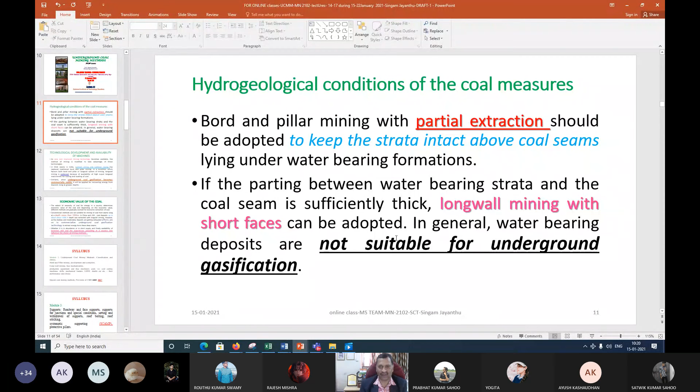Now continuing with our class, before that, if you have any doubts till now, till last class, you can utilize our WhatsApp and also our phone, whatever. Then now we have been discussing about various factors, and we also should enter into the next part of our modules on classification of mining methods, and then opening the deposit with depillaring or longwall, different types of systems. So continuing with that, in the selection of mining methods or the classification of our underground coal mining methods, I would like to continue showing only 1-2 slides and later enter into the next chapter.

Now we are left with some conditions like hydrogeological conditions, where your strata is with water, or there may be overlying seams, underlying seams, adjacent workings already waterlogged. In that case it is very difficult for us, or sometimes you may be working under the sea, under the river, or under the pond.

So in that way, please note down some examples when I talk about this, where we use partial extraction techniques also, something like working in GDK 5 incline of Singareni, under Janagam tank, Jangaon tank, that is a water tank, and it was extracted. That is some example I am giving you.

And then in Amlabad colliery, where it was extracted under Damodar River. Under the river we are extracting the coal seams, and that Damodar River was extracted with longwall mining with stowing. That is a very specific case, and of course there was some problem later. All the details I will tell you.

But what is important here is when there are some hydrogeological conditions in such a way that it requires that we should not extract everything. Either you have to backfill it so that adjacent or upper strata should not get disturbed, or otherwise partial extraction, or extraction to the maximum possible extent and then filling it back either with sand or pond ash or some other materials. If it is in metal mines, then that is generally done by your tailings mixed with some cement and other things.

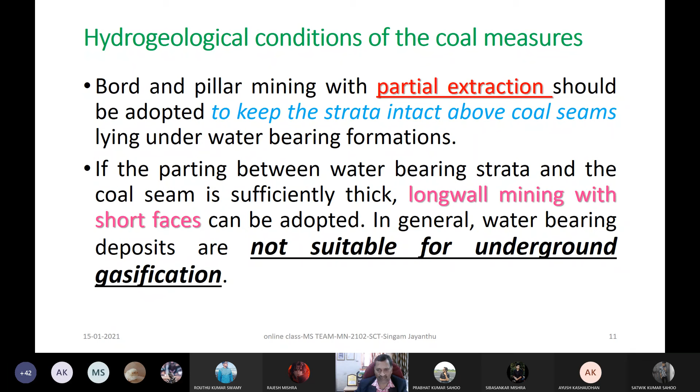There is another point here. Generally, when you go for more depth cover, or highly gassy seams, or where there is a chance of explosions or more methane content in the seam, but if water is there, then it may not be suitable for underground gasification. Of course, underground gasification is supposed to be done where it is very difficult to extract, but even in that condition, if it is water bearing, that may not be suitable. That is the meaning of this.

Now, the last but one point here is, in selection of the method, or the factors influencing selection of the method, is technological development and availability of machines. Now what is the meaning of this?

Nowadays we are getting a lot of new and improved mining technologies, and the latest, as far as underground coal mining is concerned, is longwall mining with even up to 300 meter face, and support systems even more than 1,000 tons capacity, even shield supports up to 1,200 metric tons capacity. Or even continuous miners, with rate of extraction can be more, even in board and pillar. So many things are coming up. So the method is modified to take advantage of the technology.

That means you should consider, when some condition is given to you to decide which method to adopt in that geomining condition, what are the recent technologies adopted. Nowadays our world is open, a global world, a global economy. We are striving for our 5 trillion economy, we are also part of it, to make our Atmanirbhar Bharat the greatest in future. Unless you go for new and improved technology, whether it is mining or anywhere, it is not possible. So you should take advantage of that, you should know what are the technologies, then you like to adopt in your suitable geomining condition there.

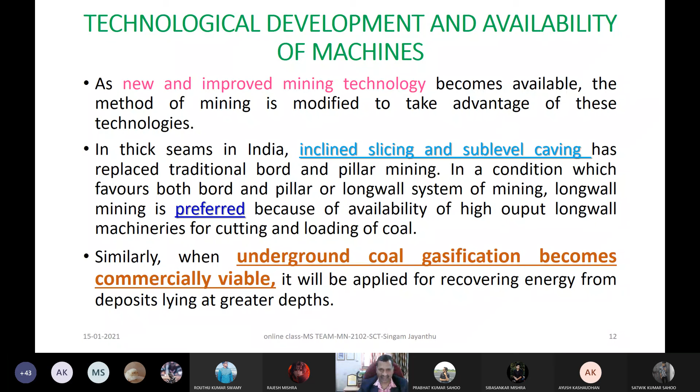We have to go for this in future. When coal gasification becomes commercially viable, we have to apply for recovering energy from deposits lying at greater depths, and also from those which cannot be mined by conventional methods - note down the phrase 'unmineable'. For such deposits, we should think of extraction not as solid coal, but through coal gasification - extracting the energy or gas. That will become the ultimate option.

Economic value of coal is also very important, and that you should understand in selection of the method. In simple layman's language: coal of different grades used to be graded A, B, C, D. All open cast mines were in E, F grade roughly. A grade is almost nil, very less. B is the best coal, like gold for us. C and D grades, many underground mines have these. B is the greatest, the best available in India at present.

Nowadays we call it G1, G2, G3, G4 - this gradation is given based on British thermal units, what we call calorific value of the coal. Depending on that, the cost or sale price is determined.

It's very simple to understand. Suppose at one place coal is best grade, costing maybe 2000, 3000, or 2500 rupees per ton, and at another place coal is very inferior grade, selling for only 1000 rupees, or 500, 600 rupees - nowadays ranging from 1000 to 3000 rupees.

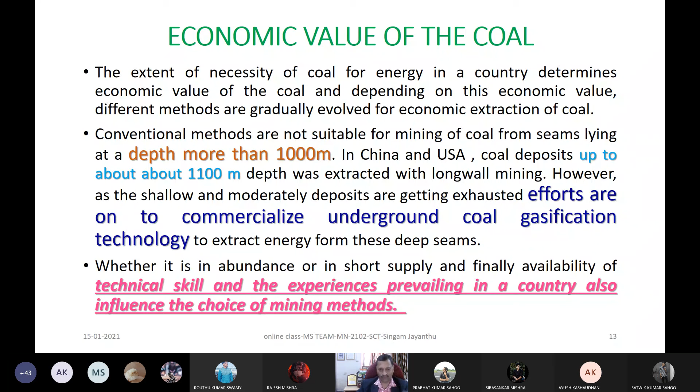Shallow and moderately deep deposits are getting exhausted, and efforts are on to commercialize this gas. Finally, availability of technical skill is also very important in a particular country, and experiences prevailing there also influence the choice. I can give examples depending on your assignment topics, where choice is based on local public - people trained in which type of technologies - and all those things are considered.

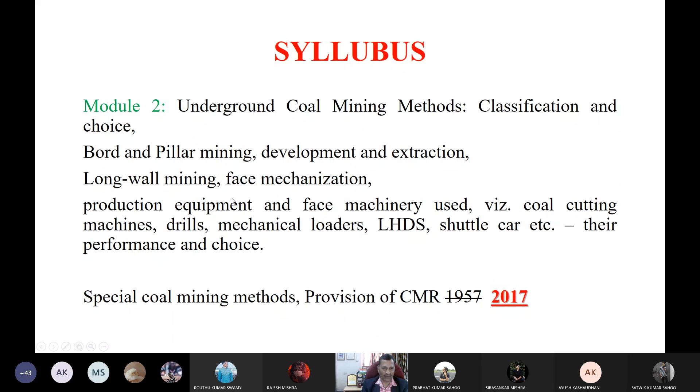In module 2, we have underground coal mine method classification and choice. Regarding choice, we already discussed which factors influence selection - geological and other factors. But classification and other aspects of board and pillar mining - development, extraction, longwall - these are things we are supposed to discuss further. This is just to remind you of what will be discussed in future.

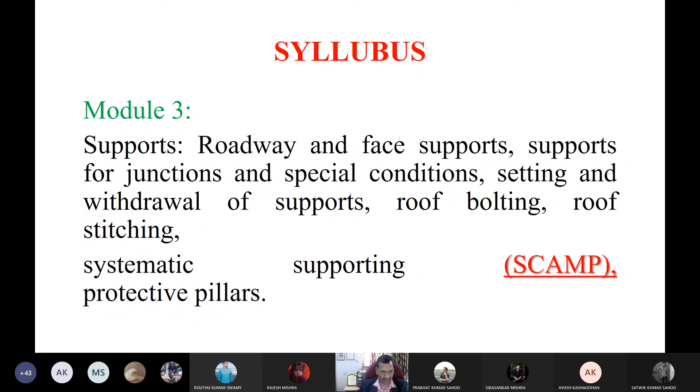You have taken very good assignment topics where you will be covering so many things, and I will be giving you a lot of recent information during discussions and presentations on different topics. That's why I'm showing you in module 3 about the support, in module 4 about the filling methods and other things. Right now, coming to the classification...

As I told you before taking a small break, I would like to say for 2-3 minutes here where classification is generally done. As already I told you in the reference books I have provided, these are from my gurus - Professor R.D. Singh Saab, who was my BTech teacher and project guide, and then Dr. T.N. Singh Saab, who was an eminent scientist and also director of CIMFR. Under both of them, under their guidance, I did my BTech, PhD, MTech, whatever.

Some of the works they have given beautifully in their books, on classification with the method, underground, thick seam mining classification, so many things. But in general, for the discussion purpose, I kept it simple.

Broadly, when extracting our underground coal deposit, either you allow that to cave - that is you are not using an alternative - or you are stowing or backfilling it. This is the broadest classification. That means you are extracting the coal and you are allowing the GOAF, G-O-A-F, either to cave or you are filling it back with backfill.

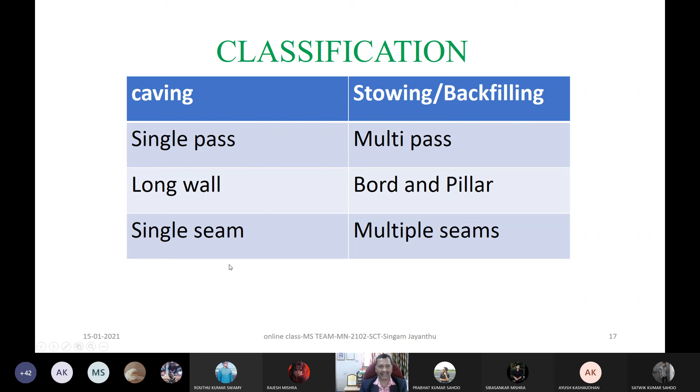Now, whether it is caving or backfilling or stowing, both can be either longwall or bord and pillar, and there come so many things, right? If it is a seam thick or thin, then horizontal slice, or inclined slice, or slicing in between, not horizontal or inclined, in between also we can have. There are so many ways how to do that. And then it can be cases with single seams and multiple seams, right? So like that, it will be there in general.

And then some special methods of mining, right? What are the special methods of mining? They are thick seam mining, as I tried to tell you something, right? It can be a single pass, multi-pass, and then multi-section mining, right? And then this can be in the descending order.

Just this will be disturbing us. I am in the class. May I know who is speaking, please? I'm in the online class. Pandey sahab, we will discuss after half an hour. Online class, yes.

Now it can be in the ascending order or descending order, right? Ascending order with stowing in section 1, 2, 3, 4 field and up. Descending order with caving like that. Or it can be bord and pillar mining. These names you can note down so that we will be discussing in detail into whatever happened.

And one more thing, my beloved students, something like bord and pillar mining or even yield pillar techniques and even the blasting gallery method, which was recently found not suitable because of some failure problems. There are cases where we've tried to find solutions and experimented, found to be highly suitable for similar conditions. Later, after 10 or 15 years, because of widely varying situations where it is implemented, that may prove to be a failure. That's what happened in many cases, my beloved student. That is the reason why you should be more attentive in understanding the practical problem and site specific conditions before applying the suitable methods.

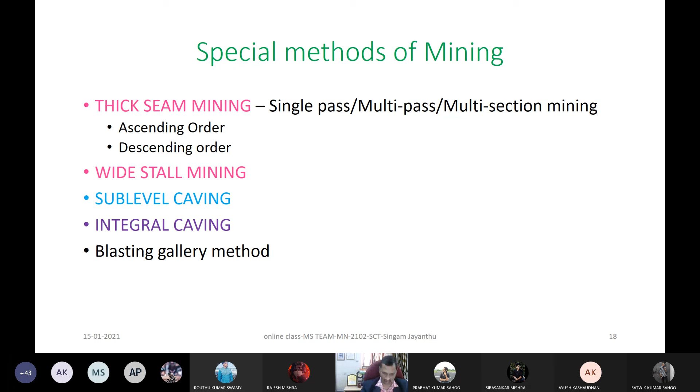Then blasting gallery method, already I given you, whether GDK 11, 21 incline, VK7, or in so many mines in GDK 8 incline also for that matter, 10 incline, like that.

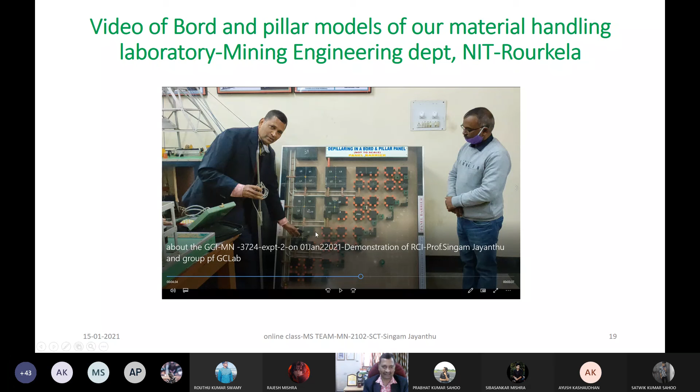Okay, now these things I would like to show you, my beloved students. Here I would like to take a small break. Right now it is 10:35, right? So I will be showing you, since you are not available here, my beloved students, on this auspicious Kanuma Day and also National Army Day, I wish that you should become like army men and women to take care of new innovative mining methods in future. So that's why it is part of our video taken for different purposes, including your purpose, to show you the models of our underground coal mining methods with bord and pillar. This is where we will be going in detail later after the break.

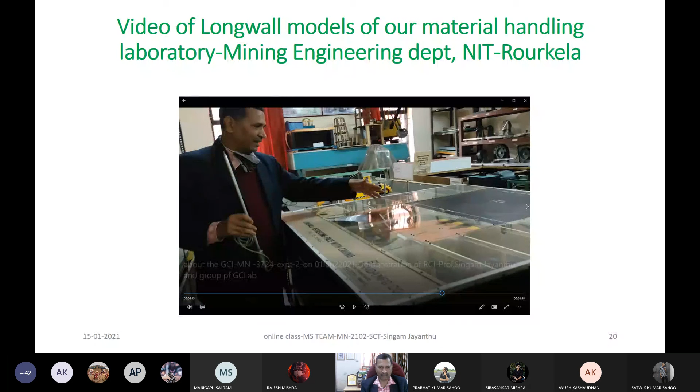And also we have a model for longwall mine. These things I will be showing you, my beloved students, before going into other opening out districts and other topics. I will take you through these things with a small break here.

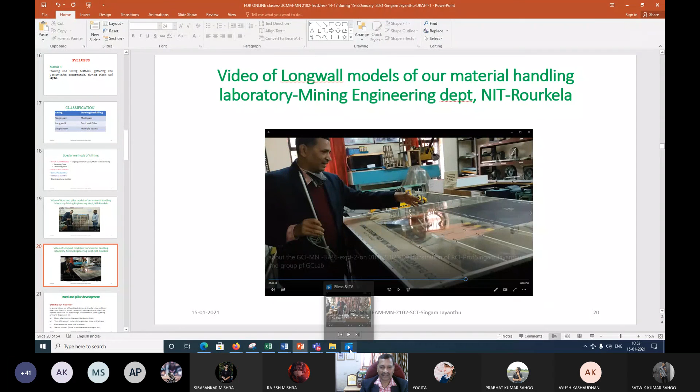So now I am showing you. Let me know whether you are able to see my screen, right? I am opening the video of our model laboratory, whatever we have here. Yes, are you able to see the screen now? Right, yes, so first I will show you this bord and pillar model.

Acha, how many of you have seen this model in our laboratory? This is there in our material modeling, material handling laboratory, and our caretaker there is our Brahma ji. So Brahma is like the creator of all these models. Whatever model is created, your face, my face, is by Brahma. So our Brahma ji is in charge of this lab.

And here you can see our beloved senior scientist from CIMFR also, our Professor Sayendra, who joined recently and interacted with you also on some auspicious day. I used to do that.

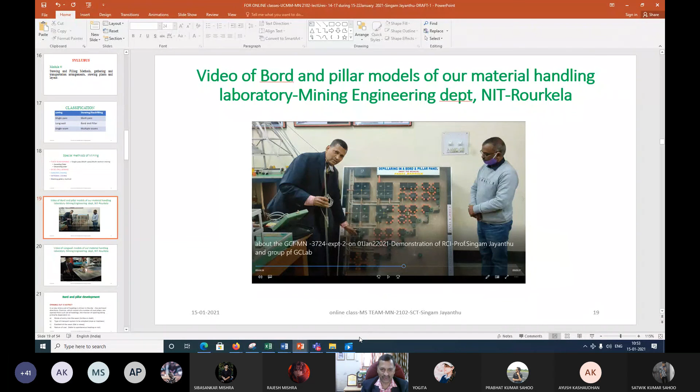And now I am taking you to that place, my beloved students. Are you able to see this? This is that video clipping, just I am showing you. And this is, what is this lab? This is the ground control lab, right?

And now I am taking you from the ground control laboratory along with my Bhaskar -- Bhaskar meaning Suraj, right. Here, now we are taking you. Are you able to hear the voice here? No sir, no sir.

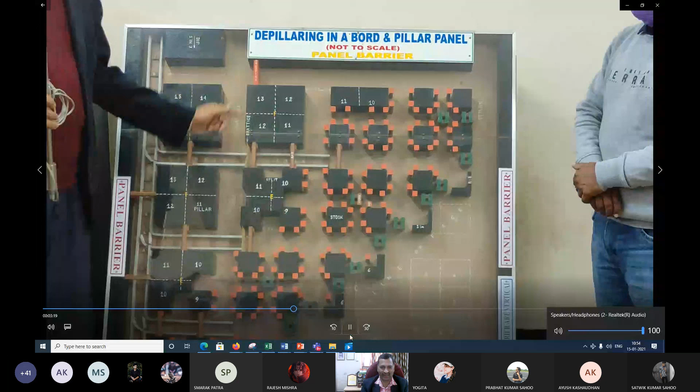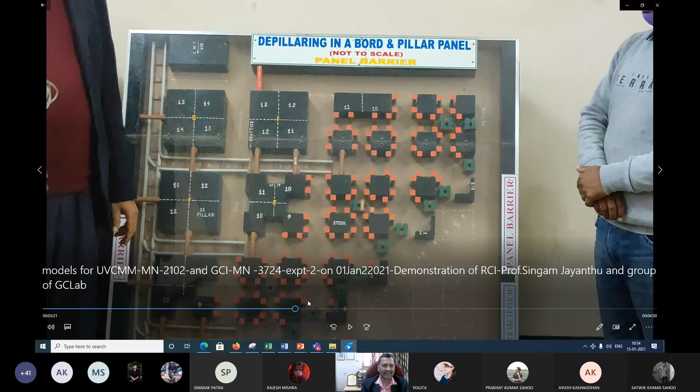Okay, so this is that model, right, of depillaring in a bord and pillar panel. But I would like to explain to you what models we have, so that especially those who have not seen or taken any training will get some idea here. But before that, let me know, how many of you have seen this model?

Yes or no? No one, sir. Okay, no sir. So I am not a very good dubbing artist like Amitabh Bachchan or anybody, so you should bear with me.

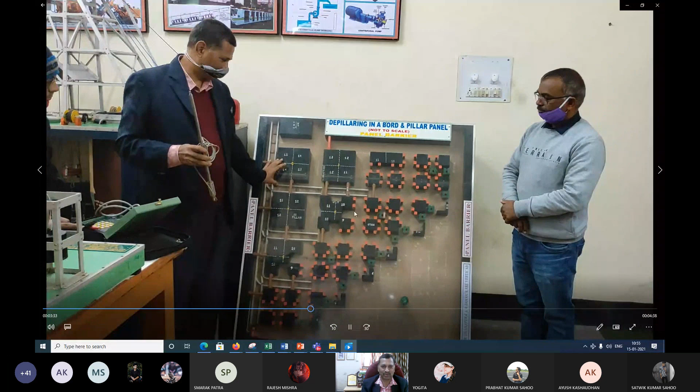It was explained in that, but the video is not audible to you. This is that bord and pillar workings, how it looks like. Of course, depillaring is being shown here, and the purpose of showing this is for some instrumentation and then understanding the strata behavior. But here I will be utilizing this for your purpose, right?

And these are the galleries, these are the levels, and then this is the dip direction, and this is the line of goaf, whatever is there during extraction by splitting and slicing -- splitting that into 4 or 5 stooks, 6 stooks, whatever it is. So they will be doing that.

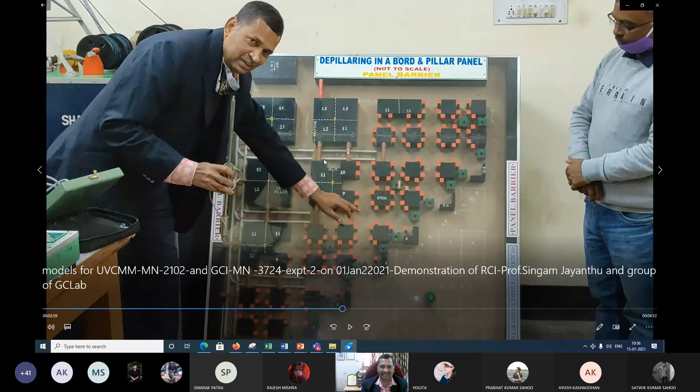So here now you can see, my beloved students, when only development is there, it looks like this. Now you can see when development is there -- or even just imagine that there is no depillaring, something like this, and this is all virgin, meaning all solid coal, and your development is only up to this. Right now, what will you be doing? Now you are developing this development gallery. This is a level that you are doing it.

Now you laid a track like this, along the dip-rise direction, and there you may be maintaining your endless haulage, not endless. This is your direct haulage, maybe from the surface, or a tugger haulage in between, from the surface or in between levels or trunk roadways.

And then you are opening your levels like this, and you will be blasting this place, going further, considering that this is a virgin seam, not developed. You imagine that. Then you are blasting this, loading this, and then loading that coal onto either LHDs, SDLs, continuous miner, or side discharge loader, or gathering arm loader, or whatever, onto the tubs, or onto the conveyor. This can be a conveyor belt. You can have it, right? So this is the way how you can be doing that development.

That's what I would like to show you here, my beloved students, and how this is designed, how much size we keep generally. Before that, when you are developing like this, this is exploring, but still you need some ventilation, right?

Some ventilation stoppings are required between one as an intake roadway, where intake air is coming like this, and then from here it is entering here, and then the return, now it has become return because these are the places where you will be blasting, so air will be mixed with blasted fumes and so many things. Even if it is not blasted, even if it is cut by the coal cutting machines, a lot of coal dust and so many things are generated, and because of the temperature of the strata, there will be a lot of heat and humidity, then your air quality will be deteriorated, and that is going as a return airway.

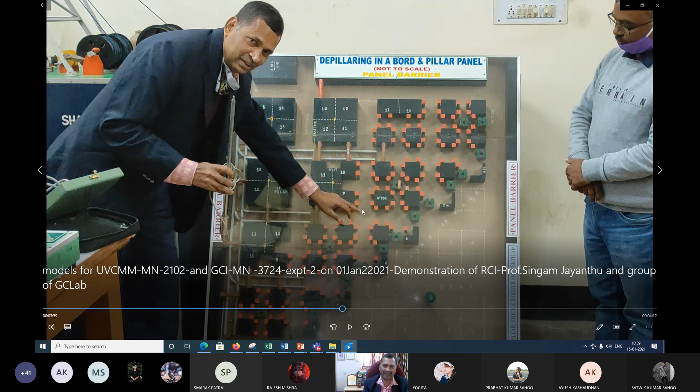The panel, how it is designed, that can now be called a development panel. But when it goes already developed, how to decide, even while developing, you can decide how much should be the size of the panel, right?

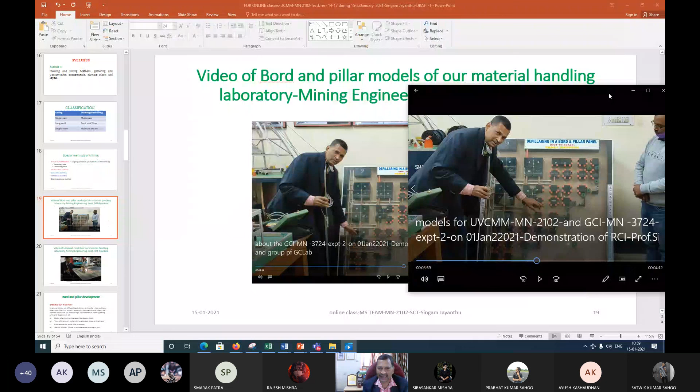So that we are taking care based on whatever may be the incubation period of the coal. When the incubation period of the coal allows you for only 6 months or 8 months or 10 months, before that period, how many number of pillars you can extract, then you will keep the size of that panel.

Then you call this panel 1, panel 2, or the name of the panel may be Yogita Madam panel, or it can be Karthik panel, Jasmine panel, Nikita panel, like that, whatever name, or 1, 2, 3, 4 number, whatever you give. This is the way how the districts or panels are created.

And then when this development, everything is over, you will not allow that regular air ventilation to go through in the same way, so many ways, later we will discuss about that. Now you see, when you go further here, you will be seeing some more, even a longwall panel also you can see. But here other things I don't want to discuss so much, about the instrumentation, I was explaining for a different purpose. Now, if any doubts, of course, we can discuss.

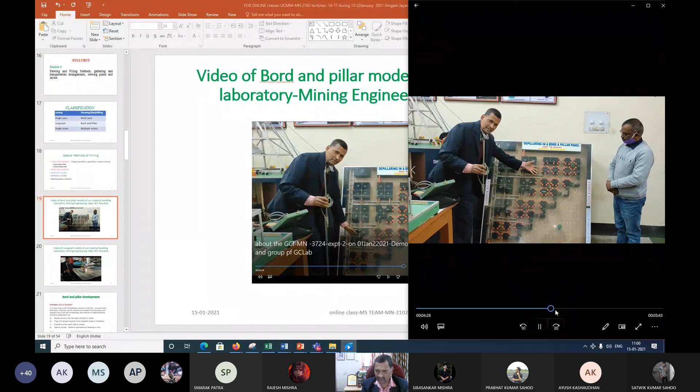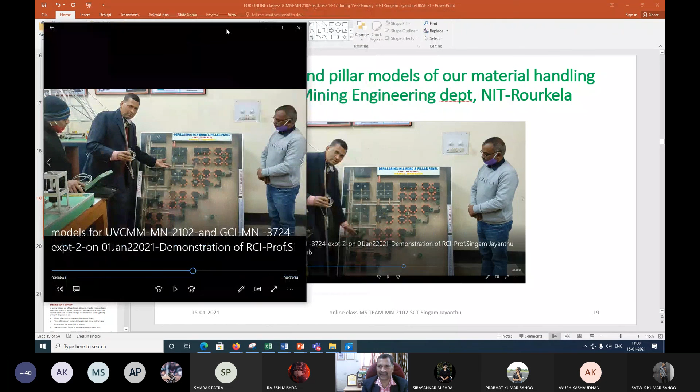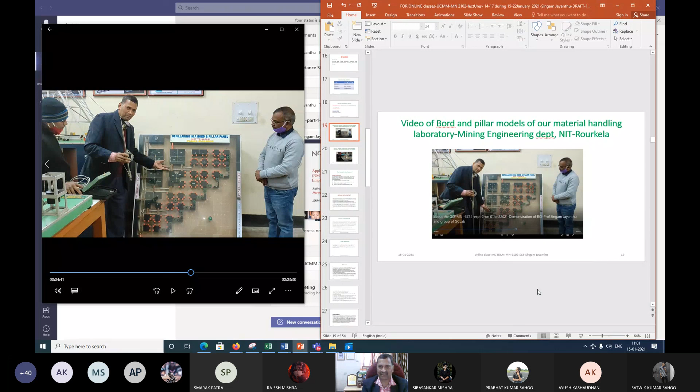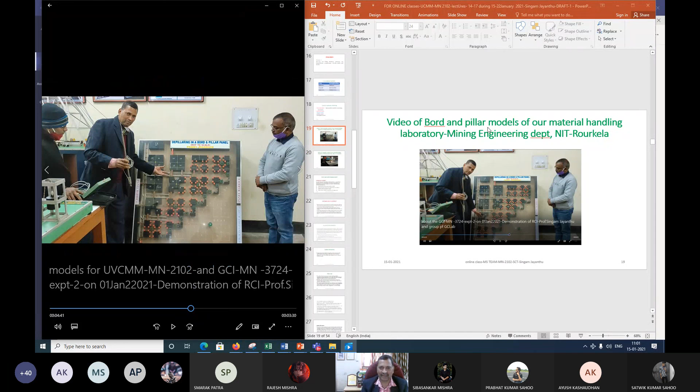But at this place itself, let me take you. If you have any doubts about this formation of the panel, let me address it at this place itself, my beloved students. Any doubts about the formation of the panels? Let me keep it in the window so that it is easy for us to discuss further. Any doubts about the formation of the panel, whatever we are discussing as far as the bord and pillar is concerned? Meanwhile, later I will show about the longwall panel.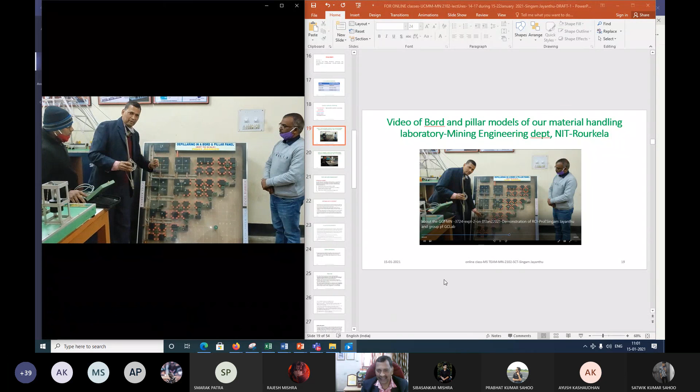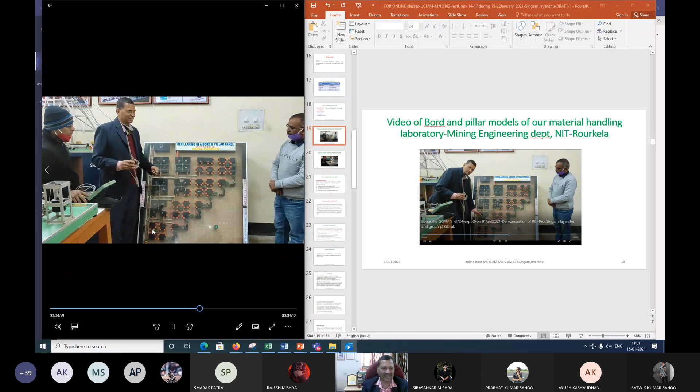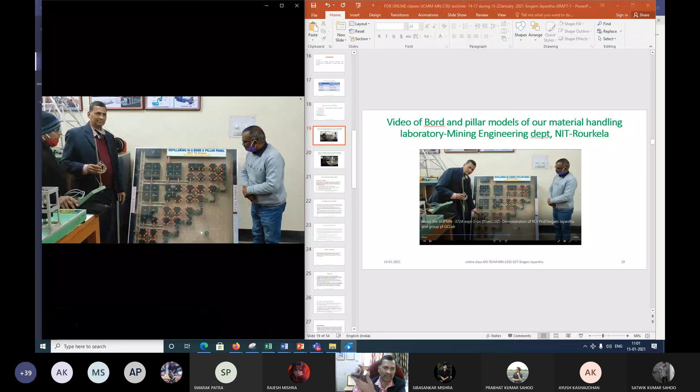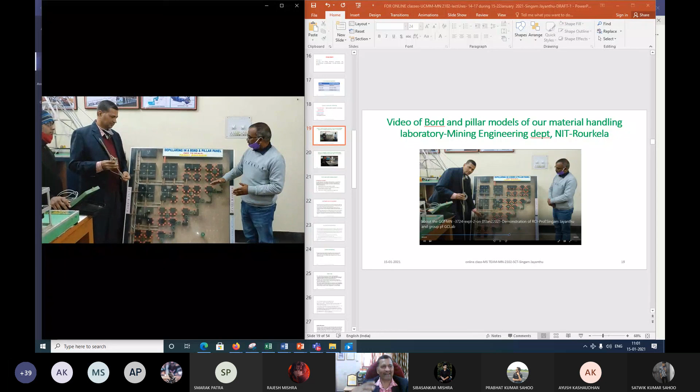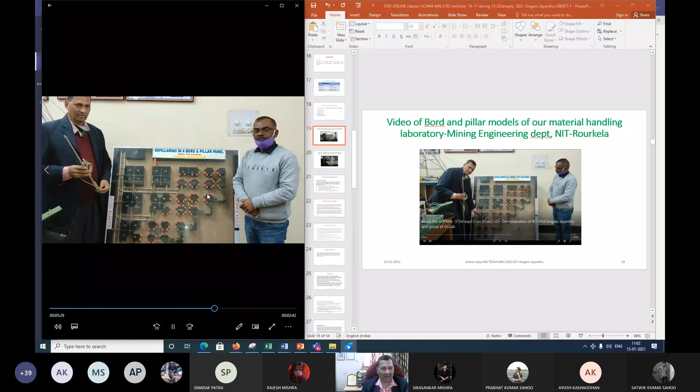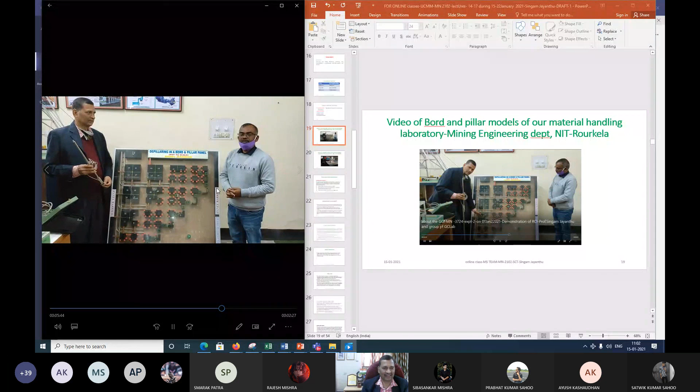Here also our Professor Sahendra helped me in explaining further with his wonderful experiences about conducting so many experimental trials, including some which I initiated when I was a scientist at CMRI. Later he continued in our own group, same group, along with mine model and mining methods department. So when you come back here, definitely you will be seeing.

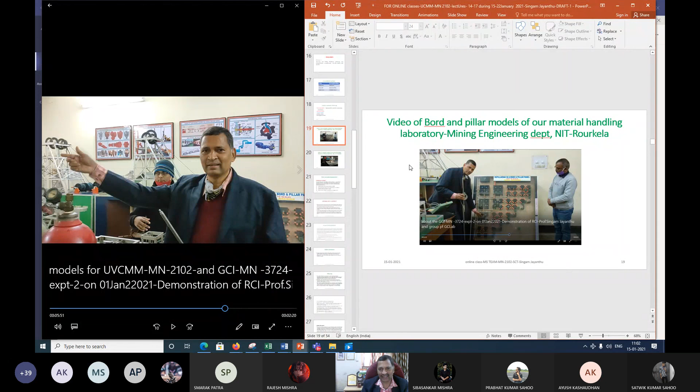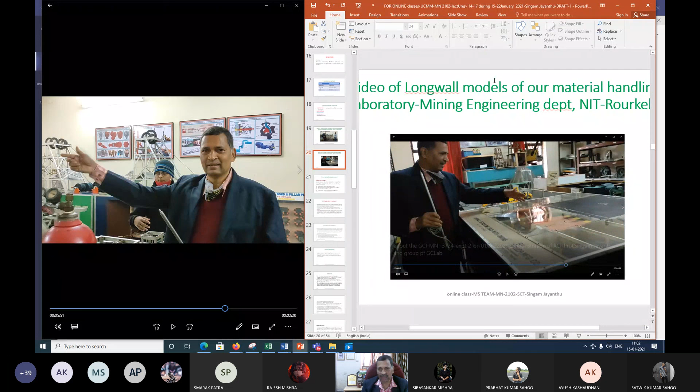Now I am taking you, my beloved students, to the next Longwall panel. How this long wall panel will be looking like, that I will be showing you, my beloved students, about the Longwall model. Now you see how this long wall model is.

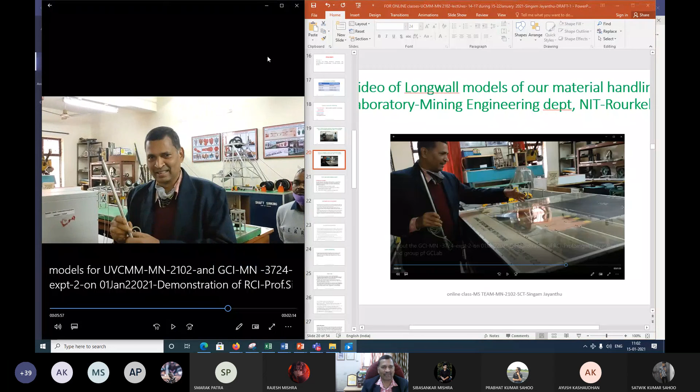I am just showing you, and meanwhile I would like to give you one good impression on this auspicious day of Kanuma Day and National. What is the day today? Anybody to respond? This is also another auspicious day, the 15th, this is National Army Day. I wish that all our underground mining engineers, including our Professor Sahendram who also passed here, become the next generation creators of new technologies as part of our Make in India, Atmanirbhar Bharat, in creating new underground coal mining methods, my beloved students.

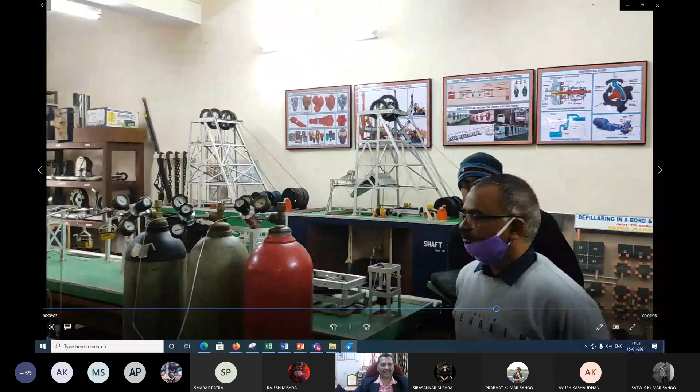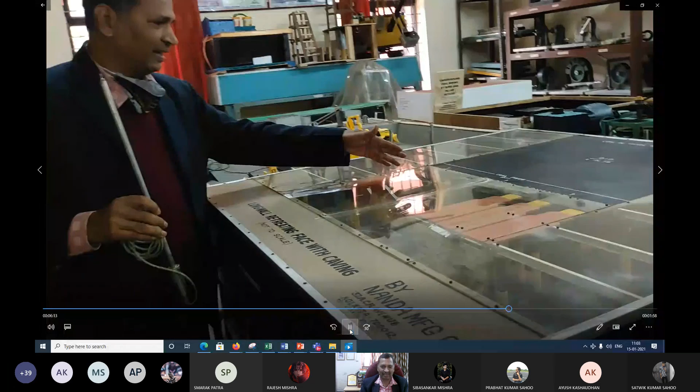So now I am taking you to the long wall panels. Meanwhile, you see all our model, you feel as if you are there with us in our NIT Rourkela. Don't worry about the cylinders, that is not going to harm you. You consider that cylinder just like the cylinder used for our chicken biryani or the very good naan prepared using that methane.

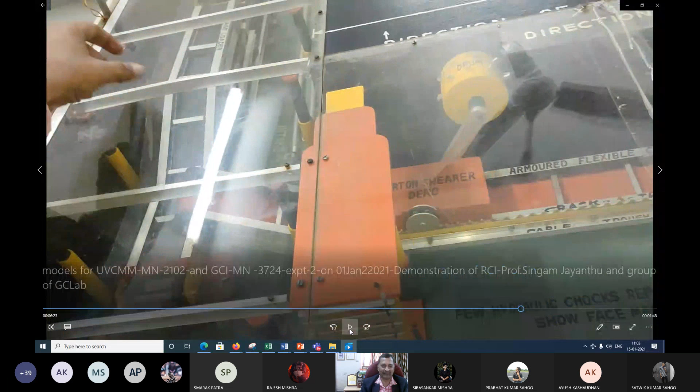Right now about this long wall panel. Now I am taking you to the long wall panel, my beloved students. Here you see, this is the main gate roadway. You may note down somewhere, main gate roadway, where what are there in that. I will take 5 more minutes, now it is 11:03, my beloved students. Then this is a stage loader, it is written here, stage loader.

And then this is a chock shield support, and here it is a shearer. This is a shearer, a DERD shearer, a double-ended ranging drum shearer. And then these are the drums, one drum here, another drum here. There are 2 drums.

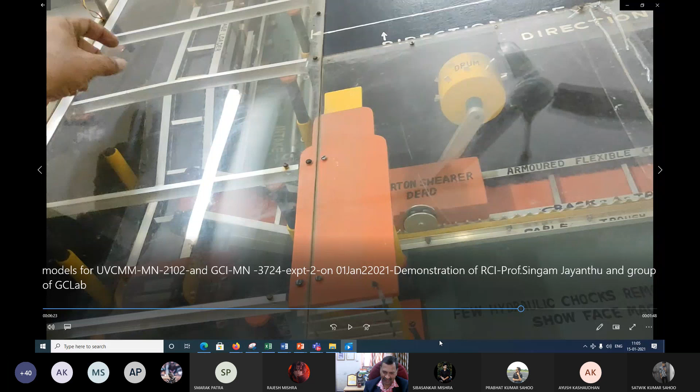Now you see, this is your long wall working face, how it appears. And then armored flexible conveyor, AFC, is here. When it is a thick seam, you will be having another conveyor, something parallel to this but below this shield or inside the goaf. This is attached to the shield, maybe your armored rear conveyor, so that the coal from the goaf, whatever is there in the roof, falls right onto this. So that is the method of mining we have to do.

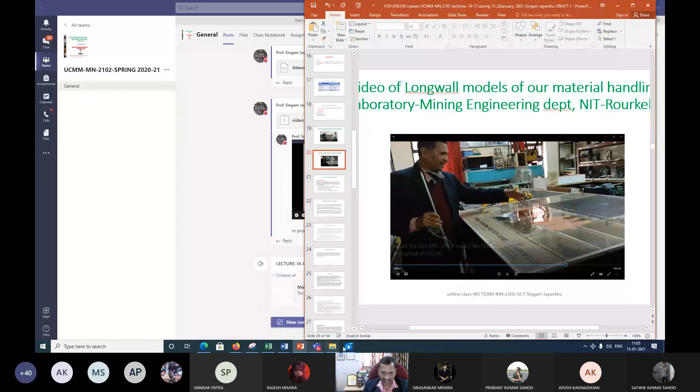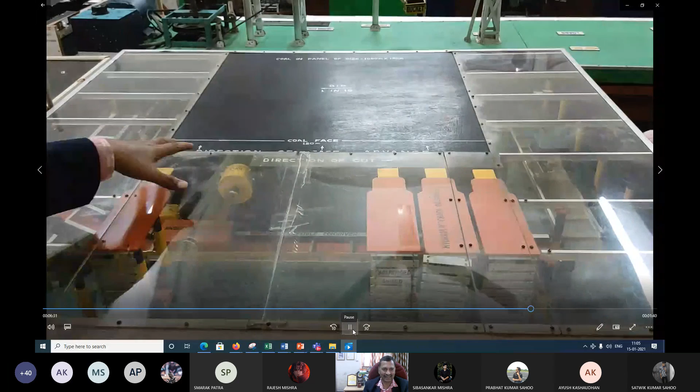Now you see some part of, and that is a tailgate, and this is a face, working face, like our students. And then you can understand better how this shield support works. This is one shield support, like this, these are the chock shield supports along the face. Now you can feel highly comfortable when you are there below this chock shield support.

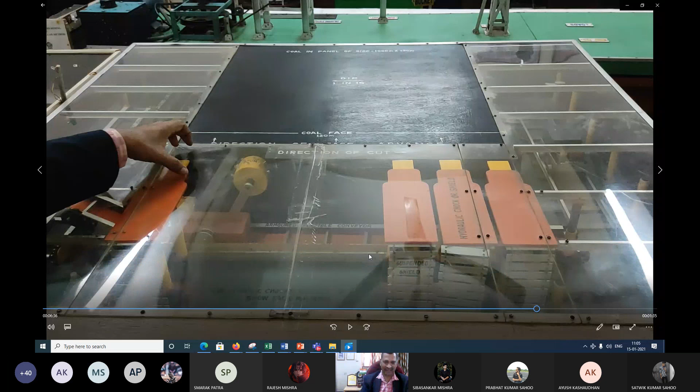Now, my beloved students of underground coal mining methods, this is also a reason why I encourage, since my joining here in 2006 as a professor after about 2 decades as a scientist, to do some transdisciplinary, translational, industry-oriented research, including mechanical engineers, electrical engineers, electronics engineers, computer science, and nowadays artificial intelligence, machine learning. Now those things are here, you can see, my beloved students.

Here the mechanical engineer's job is to see what maximum capacity of supports I can provide. Now they could do even up to 1200 tons in Australia. So around 1,000 tons we are using now itself in India, like in our Adriyala project already. Example I used to tell you, also China made ones from Jhanjra mine in ECL mines, and then with CSIRO collaboration in Australia we are doing the Adriyala project, which is a mass production technology, more than 2.8, 2.85 million tons per year.

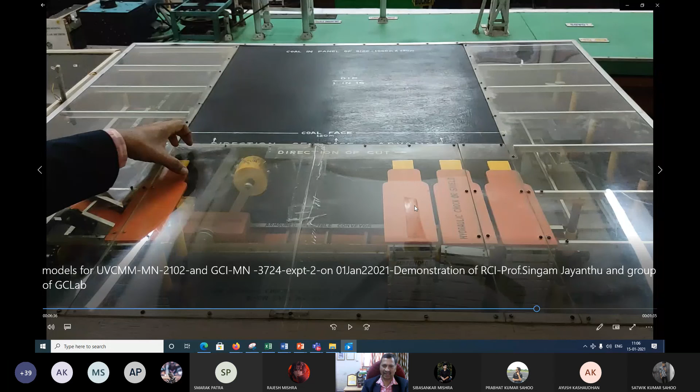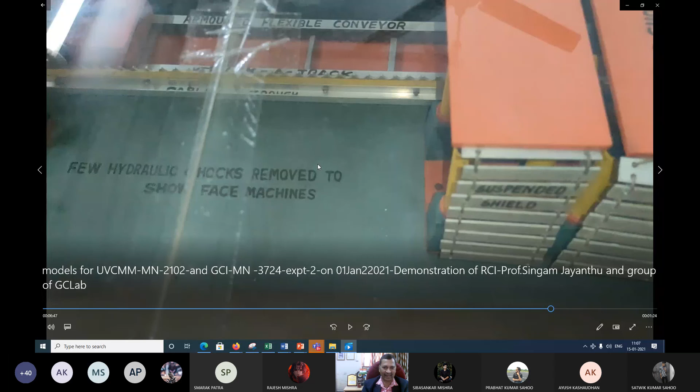Here a few hydraulic chocks are removed to show the face machine. Otherwise all these chocks will be there like this, and armored face conveyor you are seeing here, flexible conveyor, and this is falling coal onto this, and there will be some lump breaker, and this suspended shield - different laminate joints will be there, not only like this design, and that is a mechanical engineering job. Now you see a long wall retreating face with caving, right?

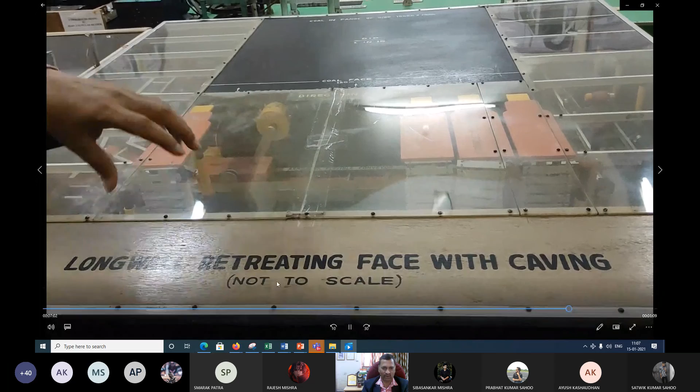This is not to scale, don't go by that - this may be 120 meters. In a short wall face, whatever I said, we have used in PVK mine only 60 meters. Otherwise, around 300 meters we are doing now, right?

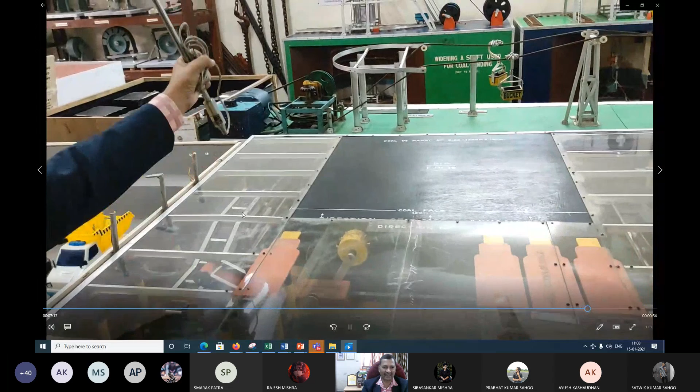This is just what I was explaining earlier to help you understand, but let me tell you - this is a stage loader and this is a belt conveyor, and there is a reason why a stage loader is required at this stage. Suppose there is no stage loader, would it be convenient? Can I use this flexible conveyor falling onto the belt conveyor along this main gate or not?

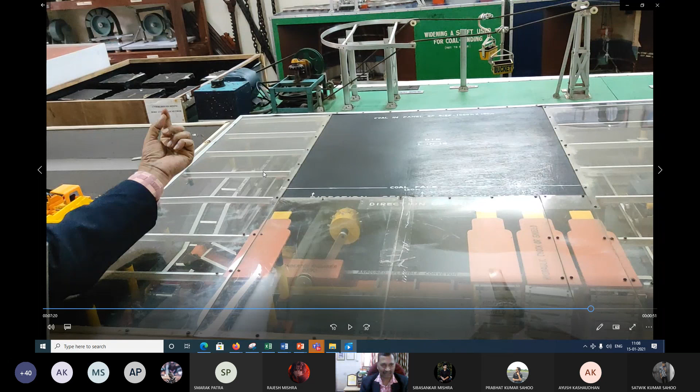That is a CEP question - not only a CEP question, that is a homework question for you, my beloved students. In the next class we will start with the answer to that question. Please note down somewhere why this stage loader is required - without a stage loader, can we have a face with the AFC falling onto the belt conveyor?

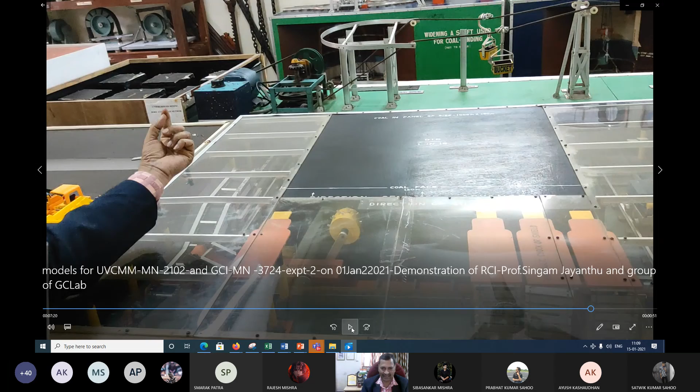Right, that's what I wanted to convey. At this stage, I hope you are having a feeling of being there - just imagine you are walking here.

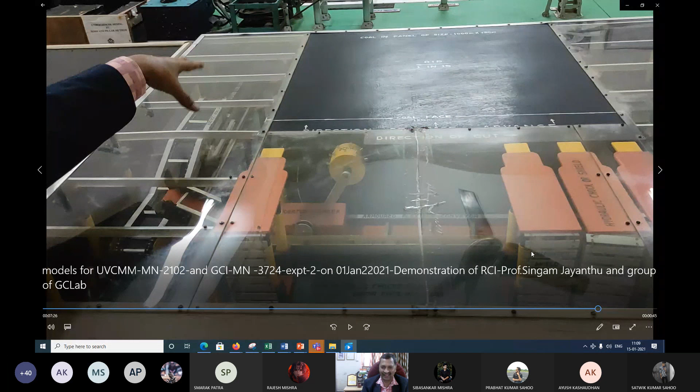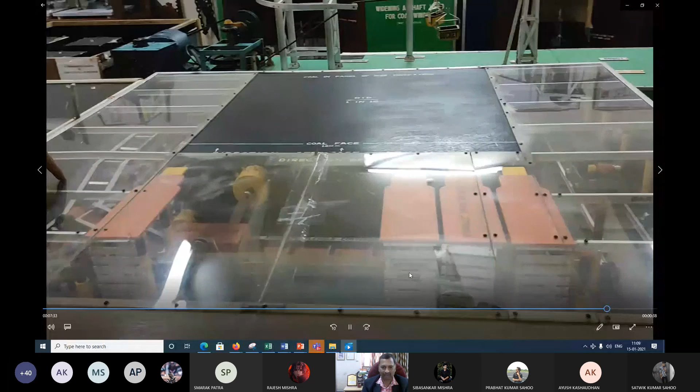Yogita madam is here, and somewhere Nikita madam, Jasmine madam, as a manager of this mine, or later as chairman of Coal India or CMD of WCL, whatever - they are working on this, doing the inspection. At present, as assistant manager and strata control engineer, underground coal mining in-charge, they are there. You imagine like that, then you will feel a lot of safety working under 1,000 tons, 200 tons, but there is care taken by designing coal mining methods properly.

Here I was just trying to explain, showing all these panels. Now I would like to stop at this stage.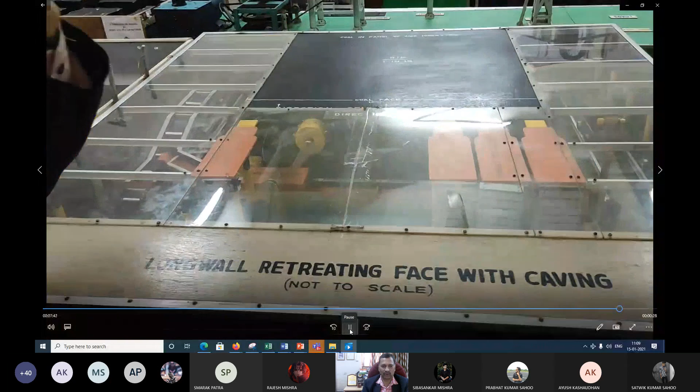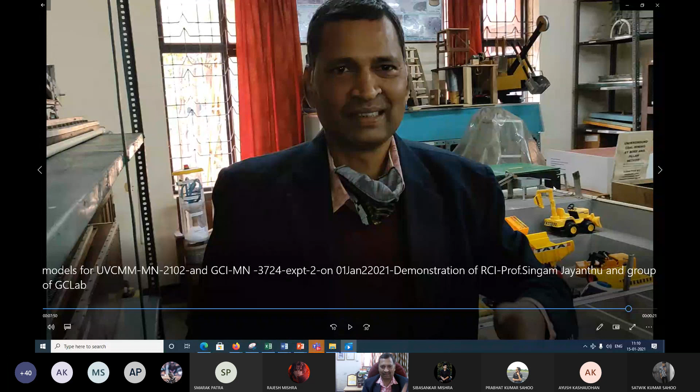My beloved students, longwall face with caving appears like this, and here with COVID-19, and then you have already nicely seen your happy National Army Day.

Now I am taking you back for your answer to the CEP question, my beloved students. Let me know who is answering your CEP question. Otherwise, any doubts, and then we will go to the summary, my beloved students.

Now shall we go for the summary? Now that is a long wall, right - we are there here. I want to show you the long wall with all this, right? So...

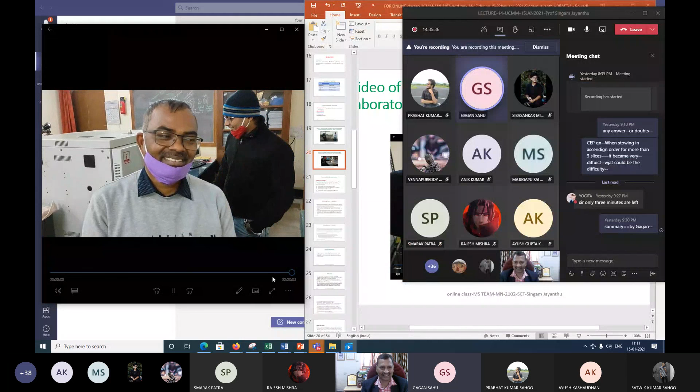We have studied that. Yes, anything more nowadays? Nowadays board and pillar mining has been replaced by sub-level caving and special methods, yield pillar techniques, and some other techniques, sir.

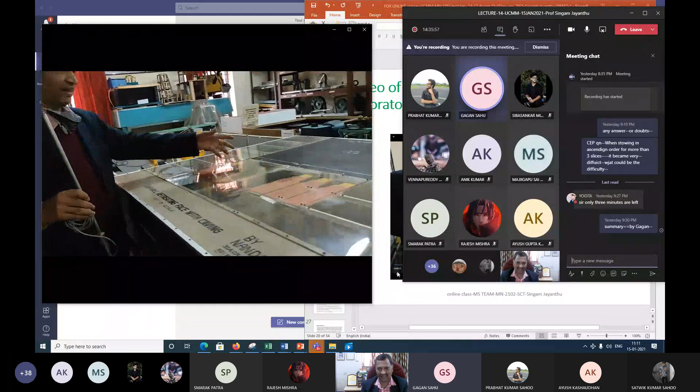Then sir, we have seen two models of underground mining - board and pillar mining, and long wall mining, sir. That's it, sir. Very good summary by Gagan.

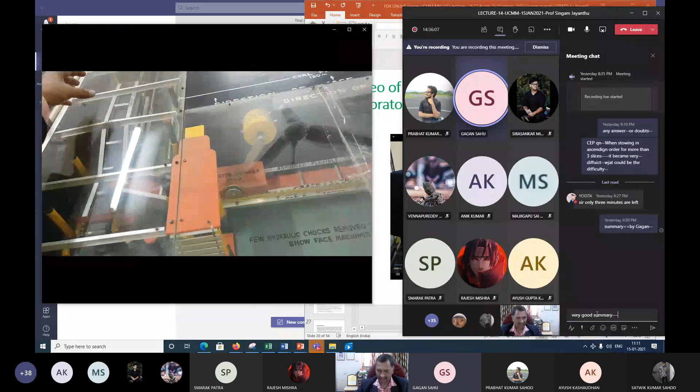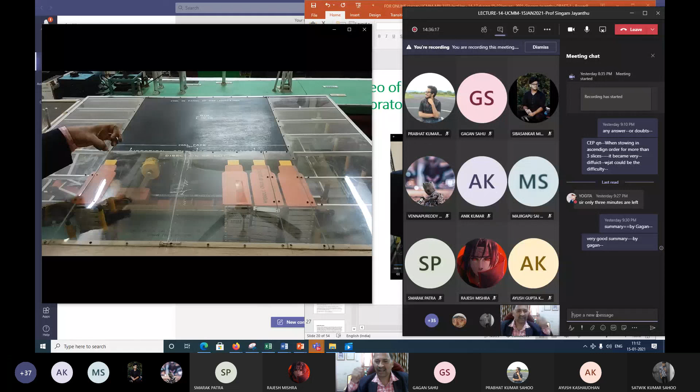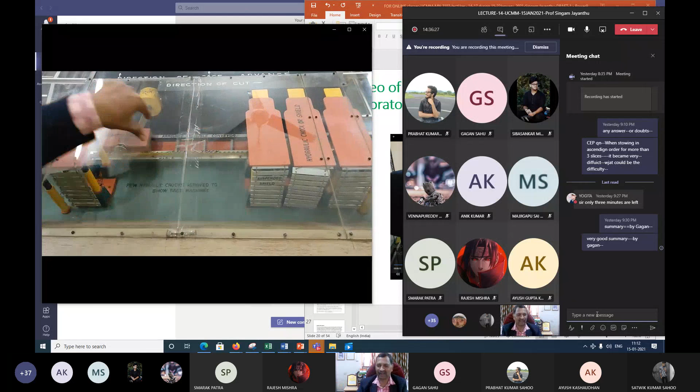Okay, then once again with happy Kanuma wishes and also National Army Day wishes, with a pledge that all our beloved students of underground coal mining methods will be like military men and women in future to design new mining methods, and this long wall which is being played will be a future for you.

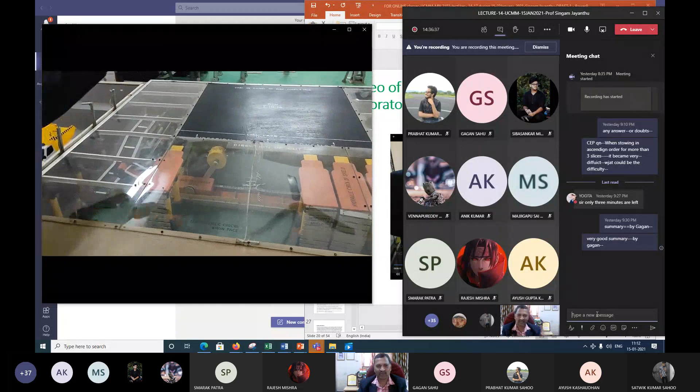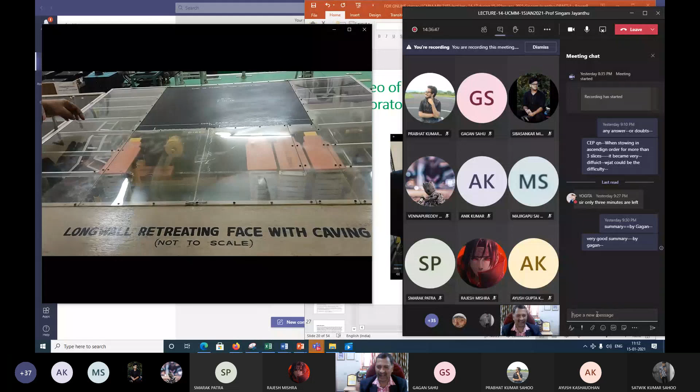That's why I just kept playing it like that, so that you will be designing new mining methods to take care of even deep-seated deposits, and also contributing to Atmanirbhar Bharat, Make in India, Digital India, all that in our new education policy. And with all these, thank you to your parents.